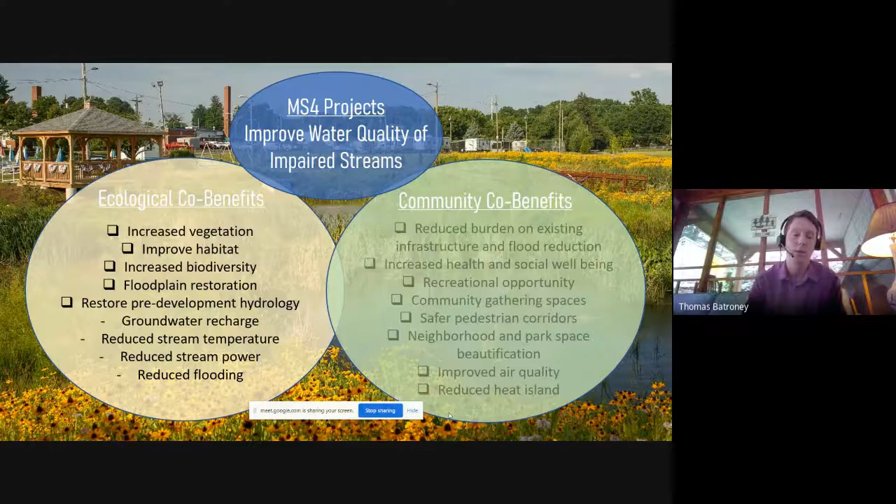And again, that flooding focus is something a lot of communities are seeing everywhere.

And then you go into the community side. You have this ecological angle, then you have the community angle and the human aspect of these projects. How can we take these MS4 projects and maybe reduce a burden on existing infrastructure, and again the flood reduction issue? How do we maybe consider the health of our communities and the social well-being?

This is tied to recreational opportunities, reducing stress, and how do we create these community gathering places potentially? And safety - when we're doing these projects, is there a safety aspect we can consider and improve, or at least make a dent in that safety issue that might be there? And neighborhood, community, and park space and beautification.

We have parks that are a lot of times in need of repair. Is there a way we could piggyback on that need for repair and include an MS4 project or pollutant reduction as part of that? So it's a lot of cross collaboration too between departments - whether it's the parks department and your water department, or your roads department and your water, having that collaboration is key as well.

And there's also air quality and reduced heat island, which are more ancillary effects, but shown to be not only a problem, but especially with climate change, the heat island. The more impervious surface we're seeing, the less we can reduce that - so reducing our impervious surfaces and creating more green spaces and shade for our communities. It's likely the elderly especially that are susceptible to that.

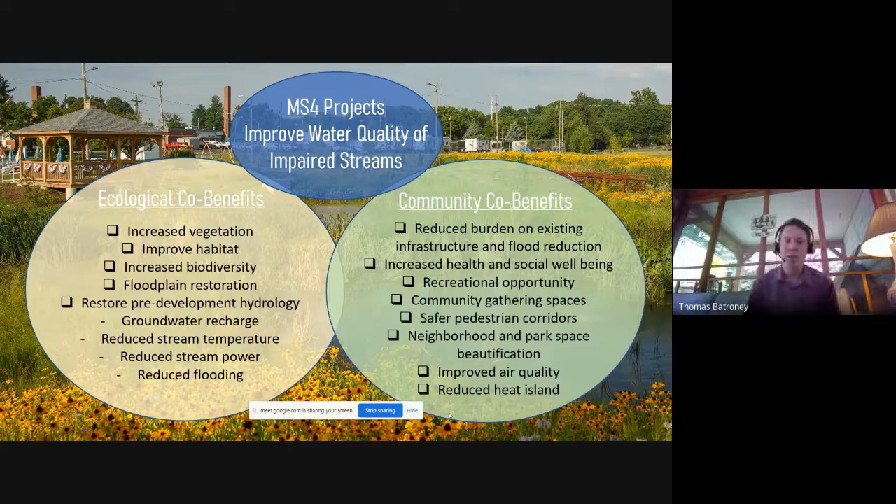And the key is really finding which of those benefits fit best within the context of the project and the community. So in that previous slide, which of those check boxes can we most check off, right? And which of those can maximize our return? What this comes down to, and this might sound simple, it requires planning for these projects through a multi-objective lens. Rather than just looking at water quality, let's look at this through a different perspective - of all those things in that previous slide, are there ways we can check off the most boxes?

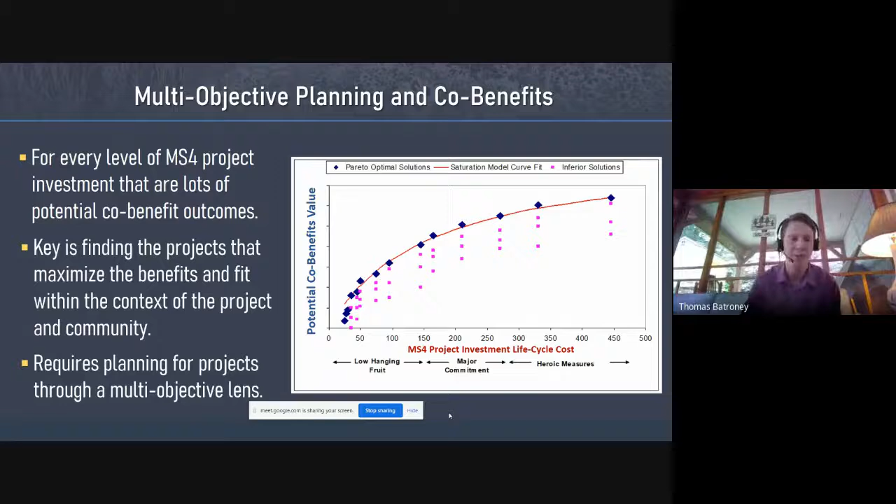But anyway, moving on to today's challenges - the Water Environment Federation released a national survey two years ago on this issue, and without question, stormwater is a multifaceted challenge. It's not just meeting federal and state water quality regulations, which we're forced to do. But if you were to ask these communities all their challenges, there's many. There's a lot that goes into this, and that's why we're here today.

If you look at two of the top ones I highlighted here, funding is always the number one concern, right? We let off that today with our current COVID situation, but in my mind, funding and lack of public support go hand in hand.

Without public support, you're not going to get it. These are two issues that, to my mind, are interlinked. How we can bridge that gap, how we can bring that together, is by including more of these co-benefits. The more we can do these co-benefits, the more we can get that public support up, and the more we can likely get the project funded. The more people can buy in, the more likely I think we'll be able to tackle this problem in the future.

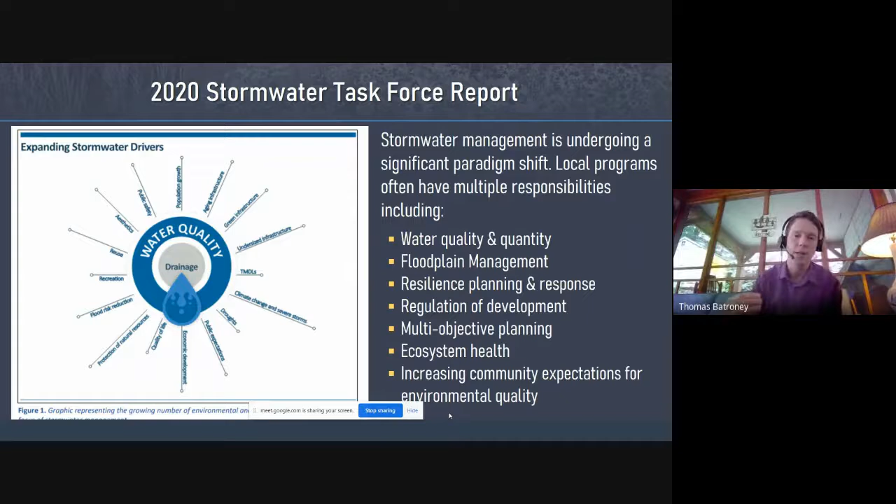I think everyone here, being stormwater planners and stormwater thought leaders on this call, gets these. But I think we need to, when we're out in our communities talking about this issue, be stressing these more and saying them more often.

So again, in summary, why multi-objective framework? We're living in this new era of financial uncertainty and budgets. The more we can do this, the better we're going to be in getting investment in this important issue. It demonstrates to the public that maybe a lot of the public with the single lens pollutant loading, especially in Chesapeake Bay, might say, oh, we're doing it, but that other community over there isn't. It gets into, well, the more you consider these multi-benefits like reduced flooding, increased public safety, infrastructure upgrades, and include that message as part of the overall public outreach, I think it's critical.

I really do. And alternative funding mechanisms such as grants and loans, I said this earlier, I think you're going to see easier access to these the more you can do this. We're seeing this with the FEMA BRIC program that's coming out this year.

Also, the state revolving funds—all of these things are showing that the more you can include these in your grant applications, the better position you're going to be in to receive that grant, and even better positioned to beat someone else to that grant. So, just stressing again, the full life cycle cost evaluation is a critical component to this.

But just to bring this all together with AKRF's approach: what we'd like to do with these projects is find ones that are cost effective first and foremost, and that first starts off with a desktop analysis and also in-field assessments. Sometimes that'll include measurements like we're doing here, where we're actually measuring bank erodibility using jet tests. Once we have that initial data gathering done, we work with the community to align what we found with other capital investments.

And find out where we can maximize our co-benefits potentially with what we found. That includes parks improvements, whether it's streetscapes and paving programs, stream bank restoration—again, which is going to be the focus of our project—and floodplain and wetland restoration. So we have experience in all of these and in getting those done.

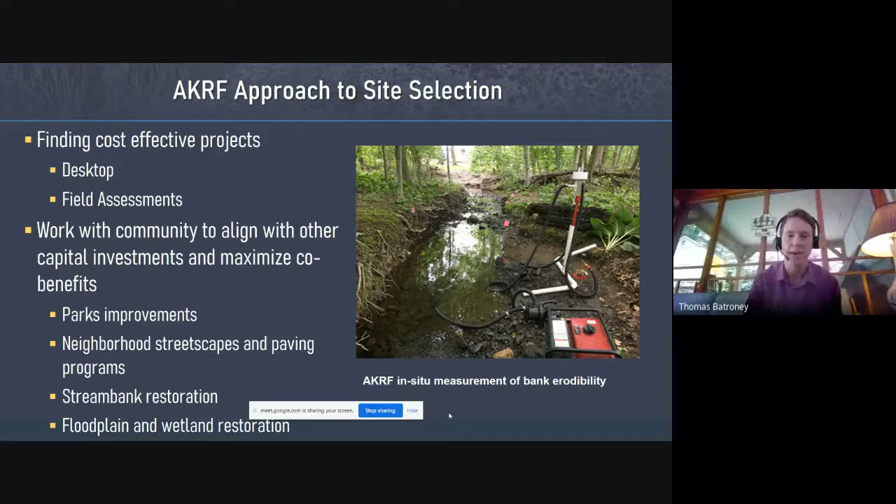Okay, yeah, I'm going to try to go quickly. A lot of folks are probably familiar with these requirements, but for those of you who aren't, it's worth a review. We'll go a little bit in the weeds on these DEP requirements for stream restoration. We're focusing on stream restoration primarily because it's really the dominant approach from a crediting standpoint, and then we can layer in a lot of additional benefits into these programs.

But here's what you need to know about crediting: most of the requirements—PADEP has a defined set of criteria for generating credit for stream restoration projects. And most of the requirements relate back to what's called the expert panel report, which many of you are familiar with—a report developed by the Chesapeake Stormwater Network back in 2014.

The reference is here below. You can look it up online, download it, read it, treasure it. It's really the best resource there is out there for crediting.

In addition to the report in 2020, early 2020, right before the pandemic, they were able to squeak out recommendations that clarify how to apply the expert panel reports to restoration projects. So that's kind of the report that's essentially the law of the land in terms of how Pennsylvania is going to recognize credit using stream restoration projects.

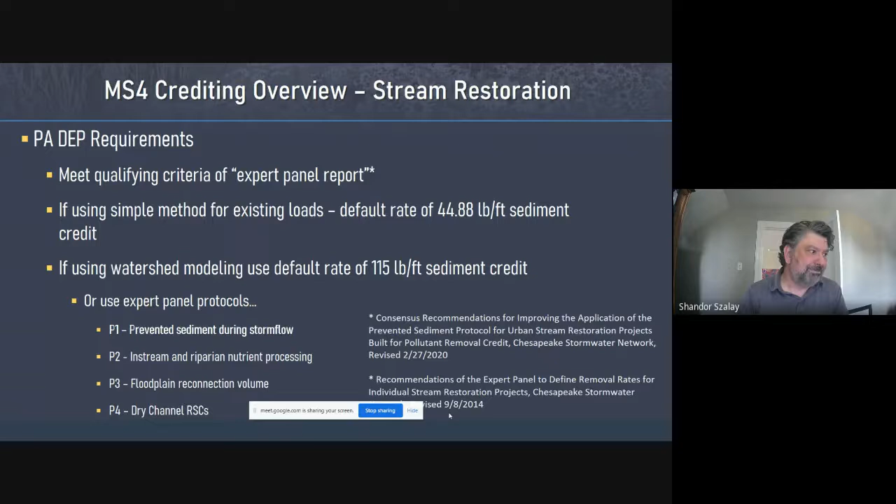So in addition to the expert panel protocols, there's a lot more to the expert panel reports, and obviously everybody should review those in great detail.

But DEP did come out with a memo back in May of 2018 that provided some additional considerations that would layer on to the expert panel protocols in terms of how to permit or how to earn credit for stream restoration projects. And really, if you boil these down, there's a number of specific requirements you can see on the slide.

But it's really that they want these projects to be integrative projects. It's really, I think, speaks to what Tom was talking about - holistic approaches that emphasize floodplain reconnection and reconstruction in particular.

Not really crediting armoring projects if you're thinking that you're going to go in and use riprap or gabions or something like that to generate credit. That's kind of a no-no, and that's echoed in the 2020 expert panel recommendation supplement as well.

A 35-foot minimum buffer, so that we need to have a nice riparian zone on both sides of the stream. No dinking and dunking with small projects, so you need at least 100 foot of project length. Trying to treat the upstream impervious - I'll mention that in one of our case studies - and then making sure that you're going on both sides of the channel where feasible. It's not always feasible, there may be land ownership issues, but in particular, when that's possible.

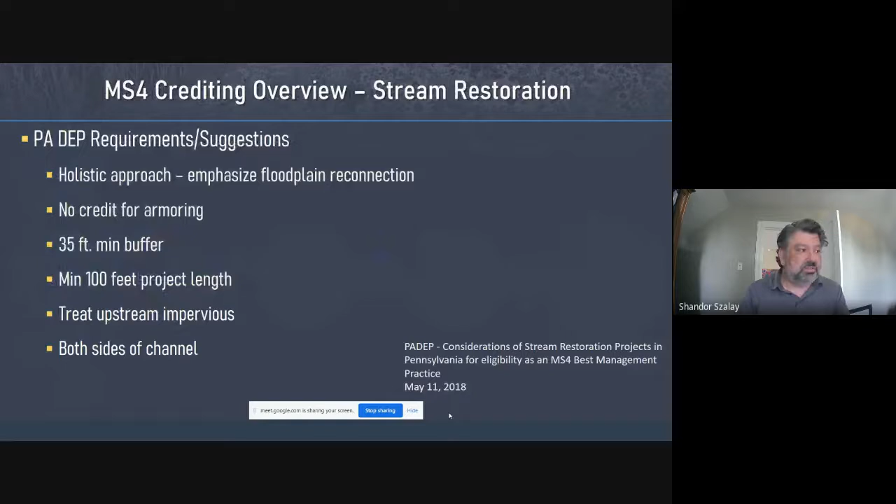Anybody? No? Okay, so just to drill down a little bit into Protocol 1, I won't get too in the weeds on the expert panel reports, but wanted to drill down a little bit on Protocol 1 since it's such a critical protocol for prevented sediment for stream restoration projects.

When you look at Protocol 1 in detail, there are really three primary components you're going to use. You're going to estimate a bank erosion rate based on what's called a BEHI rating, which is a bank erodibility assessment, married with a near bank shear stress assessment, which is like the shear stress applied near the erosion site.

That's going to be your bank erosion rate, the height of your bank, the bulk density, which is how dense the material is, converting essentially from volume to weight. And that's going to give you this gross bank erosion in pounds per year.

And then you're going to apply two ratios to this gross bank erosion. One is called the sediment delivery ratio, and that accounts for the fact that not all of the sediment you're preventing from eroding turns into a sediment reduction in the Chesapeake Bay itself. There's a ratio of sediment produced at a site to what's delivered to the bay, since there's a lot of storage in floodplains and in-channel storage along the way.

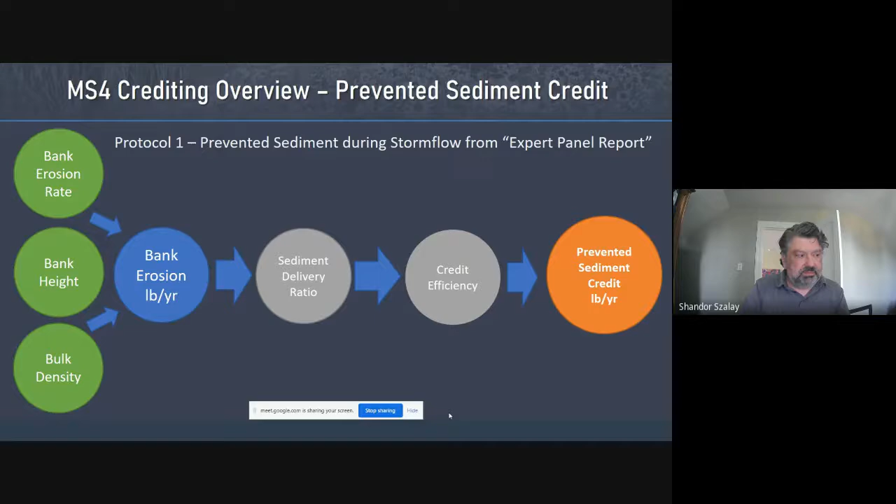So the first project I wanted to talk about is a stream restoration project that we worked on several years ago in Chester County, Pennsylvania, which is southeastern Pennsylvania, on a country club, actually called Whitford Country Club.

This is a little headwater stream called Colebrook Run, a little first-order tributary, but really causing a lot of havoc for the stream and for the golf course in particular. So they called us up kind of out of the blue with concerns about repeated damage to the course from erosion and flooding.

And this history of Band-Aid solutions, so they would erode in a particular area, they would put some riprap there, continue to erode, and they wanted really a holistic approach. So we sat down and met with them.

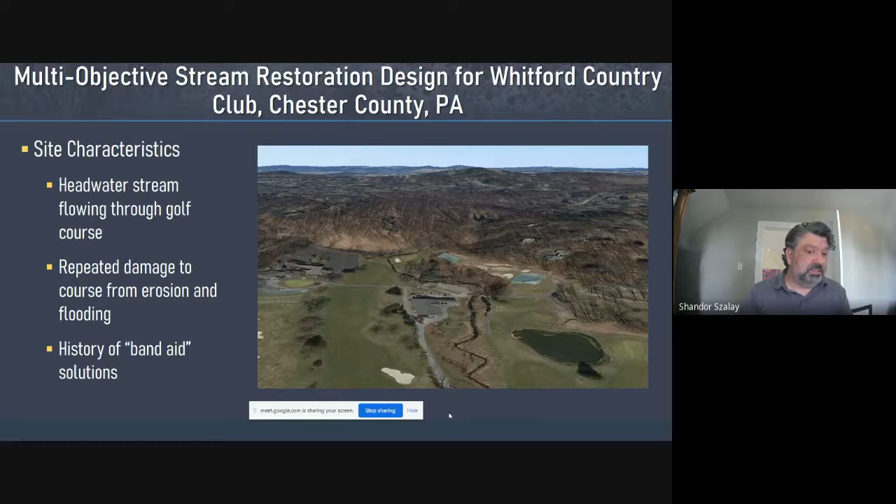Next slide, please. We teamed up with the local conservation district, and talked about some overarching goals. This was really also tied to a Growing Greener grant that we were interested in applying for.

And ultimately we were successful in securing about $400,000 for that grant. But you can see the goals are very multi-objective, nutrient sediment loading definitely, we need to do that for our...

MS4 and Growing Greener grants. Protecting near course assets, we had a clogging irrigation intake as a result of all this sediment that's in play. Improving aquatic habitat, course aesthetics, maintenance facility runoff.

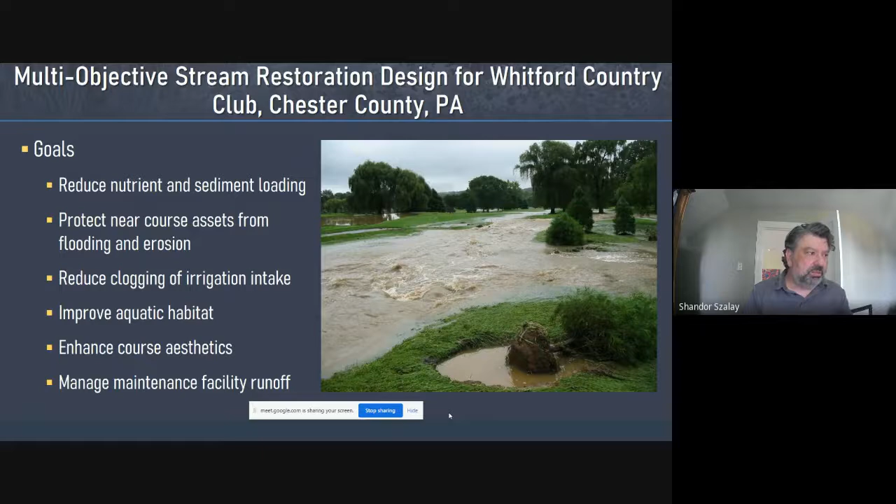So the approach was really, I'll go through a series of slides talking about the approach, and you'll see some built project photos. This was at the upper end of the course, a very high energy, steeply sloping channel with lots of bank erosion, causing coarse material to be put into the stream and transported downstream into less steeply sloping areas, filling in the floodplain and channels and leading to flooding. We wanted to get that under control using a boulder toe and soil lift approach.

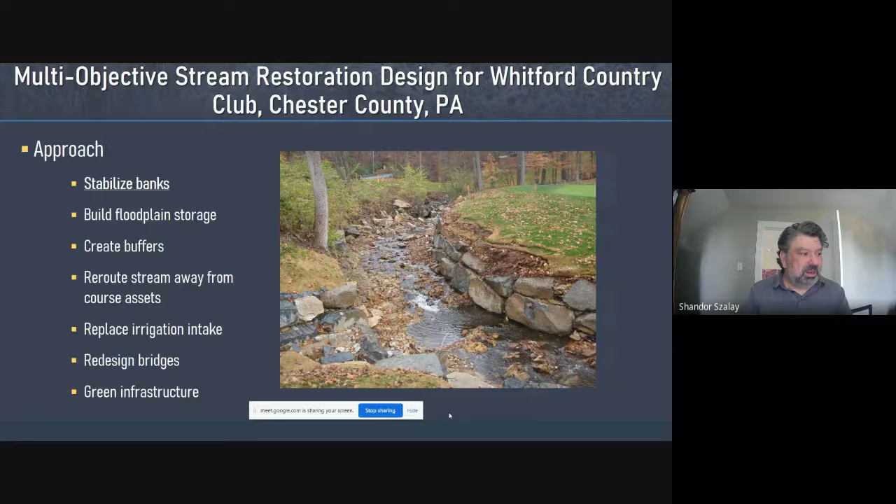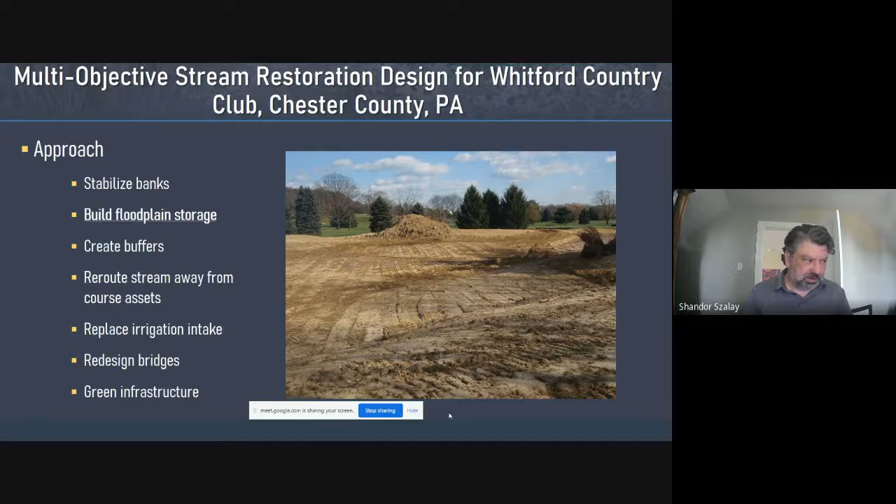In the middle portions of the course, we excavated a large floodplain. This was a huge excavation project to lower the stream by about 4 feet, which is where all the flooding was occurring. We built a new floodplain at a lower elevation and completely rebuilt the channel of the meandering stream using natural channel design principles. We were able to use the excavated material to build a new driving range for the course, a great reuse of material on site.

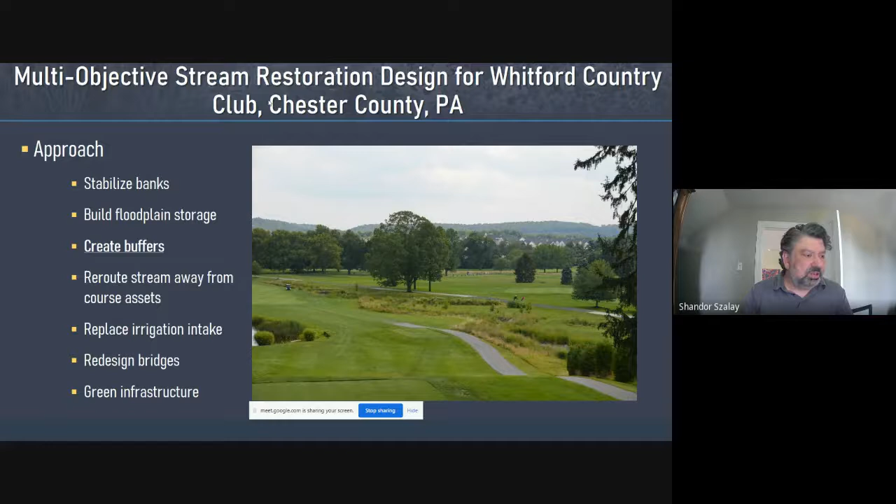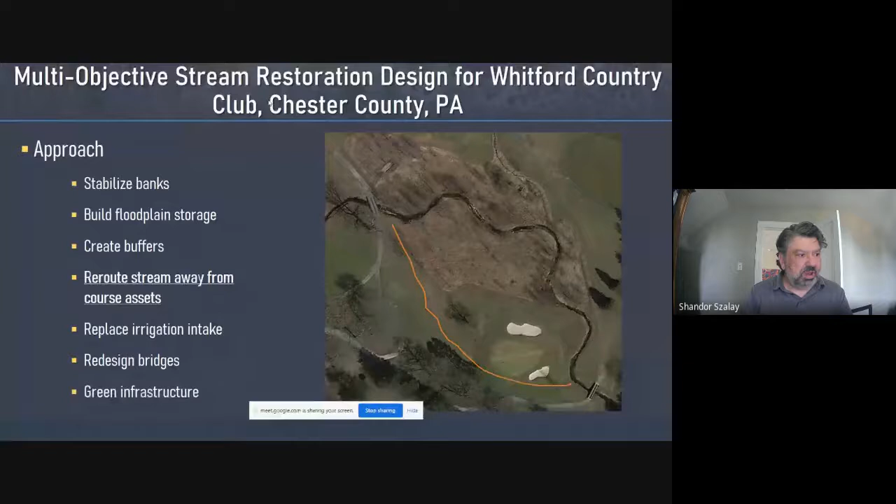In the lower areas of the course, we were able to completely reroute the stream. You can see the pre-existing route in orange here. We created a meandering channel that went out into this old field, away from the course, which is great for the course. For the stream, we were able to route it through this corridor, which is now completely forested - we planted hundreds of trees here. The regulators really loved this, as well as the Growing Greener funders. It was a big win for the ecology of the stream.

We were able to install a lot of woody debris and root wads into this section, things we couldn't do in the more developed portions of the course. Turning our attention to ecology and allowing the stream to do its thing in this old field was a critical approach. Then layering onto that...

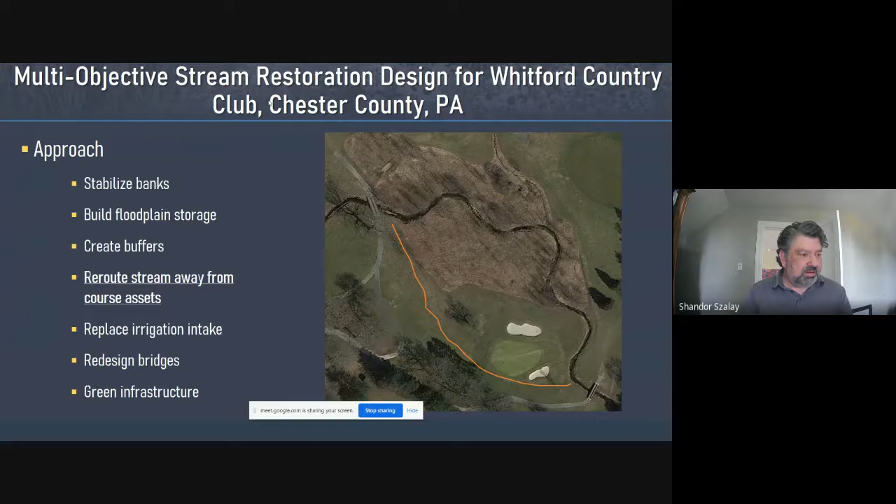Replacing the irrigation intake - that's the new intake there. It was previously clogging, so we located it in a step pool structure so it would draw nice, clear, clean water within an existing design pool, which is a great improvement. You can see their irrigation pond a little further down.

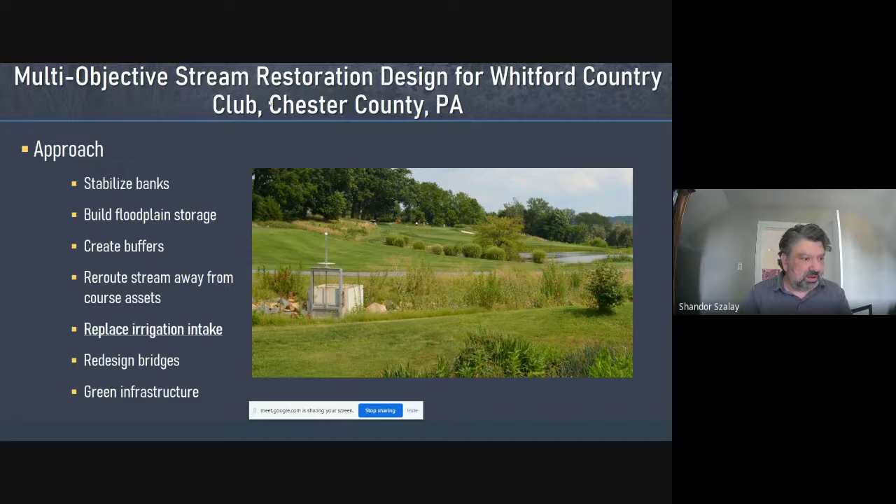And then redesigning bridges. There were some fish passage issues associated with the current vehicular bridge, so we replaced the previous bridge with a Contech modular arch bridge with a bottomless design to promote fish passage, and also replaced about 7 or 8 cart bridges along the way to reduce accelerated flow through the bridge openings, which was creating a lot of bank erosion.

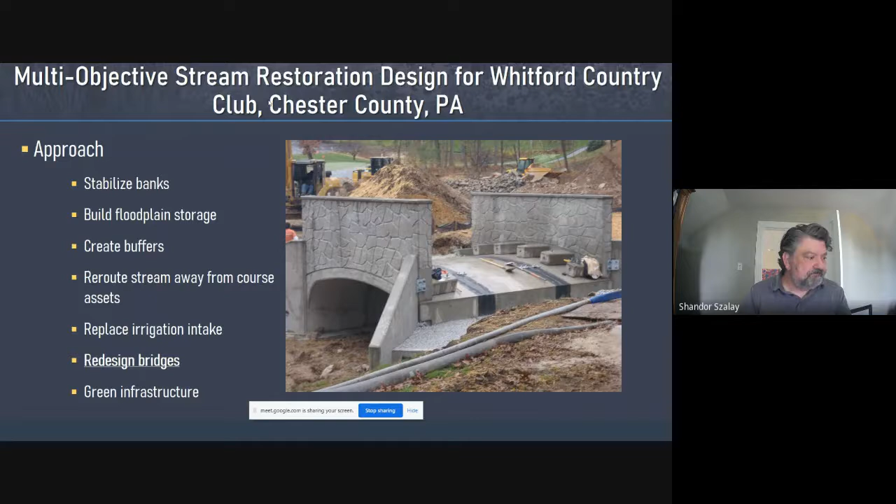Finally, green infrastructure was a big part of the project - you can see some bioswales adjacent to the creek providing treatment of runoff from their maintenance facility, which is located right near the creek. This was a big draw for funders and provided lots of pollutant load reduction. The idea is doing a lot of things with the same project. In this particular project, the best part was that the municipality, West Whiteland Township, didn't have to spend any money on it.

The club actually funded the entire project, minus the Growing Greener grant, which is about $400,000 of the project. Total project cost is about $1.2 million. The club, through assessments of their membership, paid for about $800,000 of the project. So zero net or gross investment by the municipality to get all these benefits.

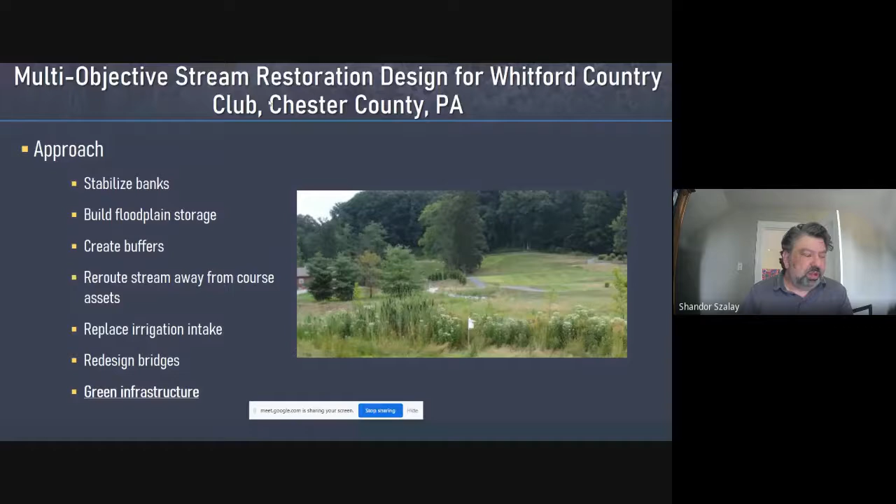So I want to move quickly into another case study, and I want to turn it over to my colleague Kevin Flynn. This one was in the Wises Mill Run watershed in Philadelphia. This is a project we did. We've done several projects like this in the Wissahickon.

It's a steep headwater tributary feeding the Wissahickon, which has a high flow TMDL for sediment, with a large impervious drainage area, although the park itself flows through a nicely wooded riparian valley. The drainage area is highly impervious, about 200 acres draining to this point, resulting in very significant bank erosion and sediment production that we have to contend with.

As with the previous project, we sat down with the Philadelphia Water Department and talked about multi-objectives: putting a premium on reducing sediment and nutrient loads, but also improving aquatic habitat, protecting and repairing near-stream infrastructure, and preserving the historic character of the valley, which has significant old walls and other historical remnants that are pretty interesting.

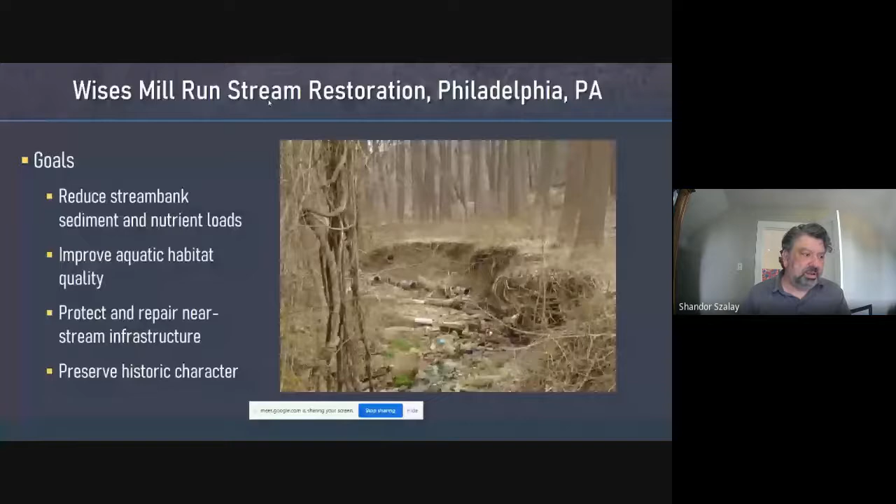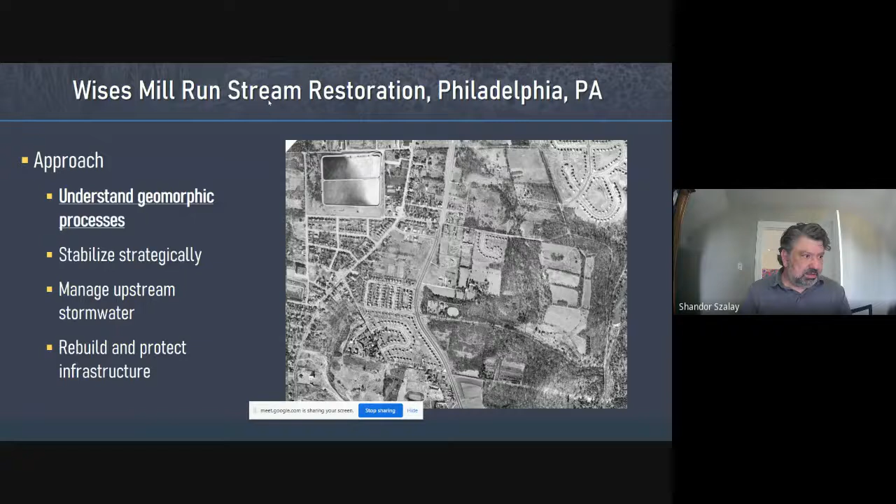We conceptualize that response using a channel evolution model in which the common response is degradation, widening, reaggradation, and a quasi-equilibrium. That whole sequence moves from downstream to upstream, so you have downstream segments that have already gone through that sequence, and upstream segments that are pretty raw and still going through a lot of adjustment.

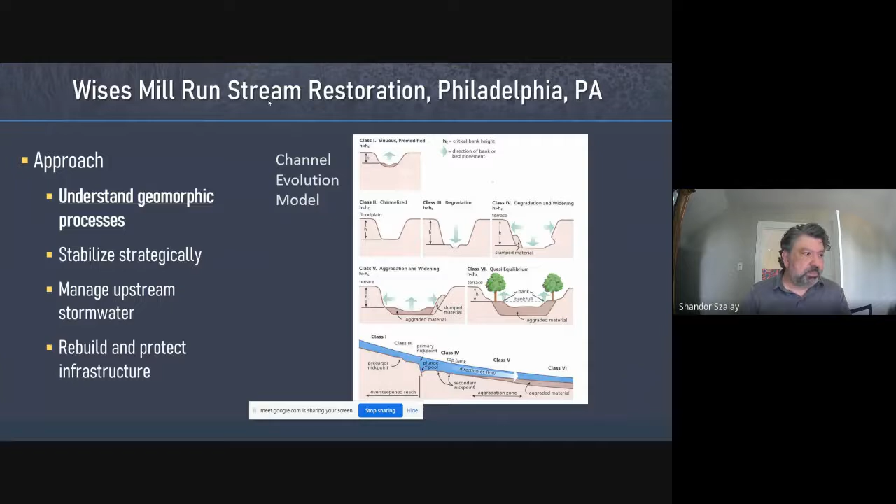At the upstream end, the down-cutting runs into an existing stormwater outfall, which is really the head of the channel. So we have infrastructure damage and a lot of active erosion in these upstream segments as well.

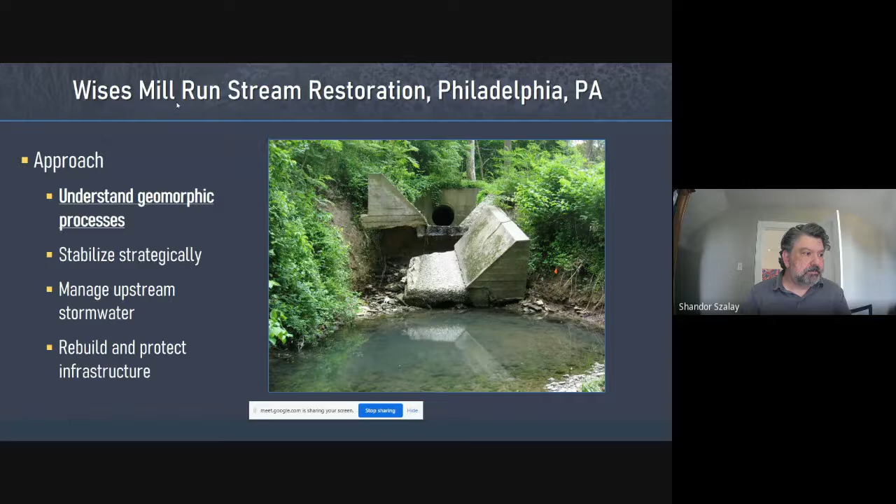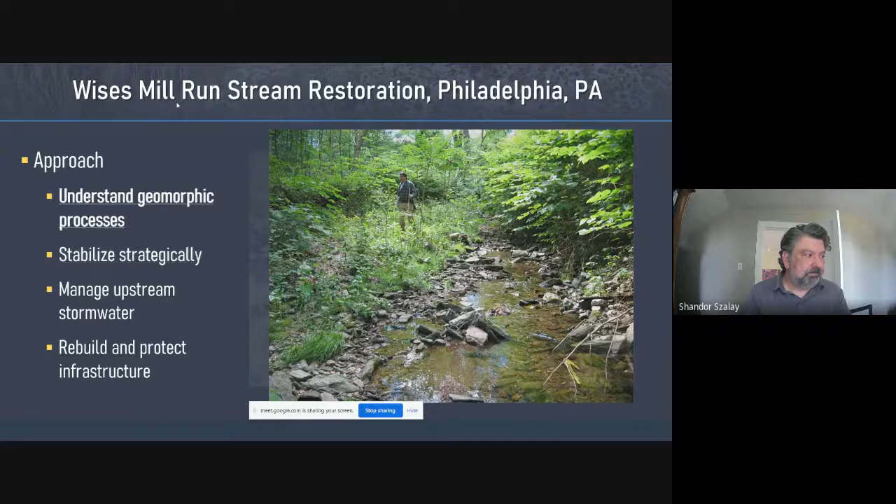We wanted to stabilize the stream channel strategically, so most of our active stabilization and restoration work was concentrated upstream. You can see a step pool channel here and some outfall stabilization work at the outfall I just showed, really focusing that active stabilization on the upper portions of the channel, which were still pretty raw and adjusting in that channel evolution model sequence.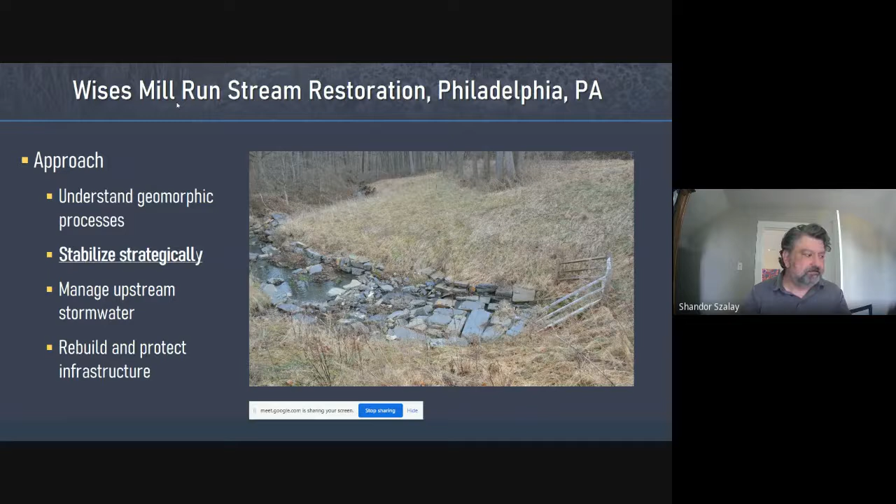With this approach, we really wanted a multi-objective design even with our stormwater wetland—looking at detention time for water quality benefits, infiltration volume for base flow, and excess shear reduction for channel protection. That's a measure of the exceedance of the critical shear stress, which is actually responsible for erosion in the stream channel. I'll get to how we go about looking at that on the next slide.

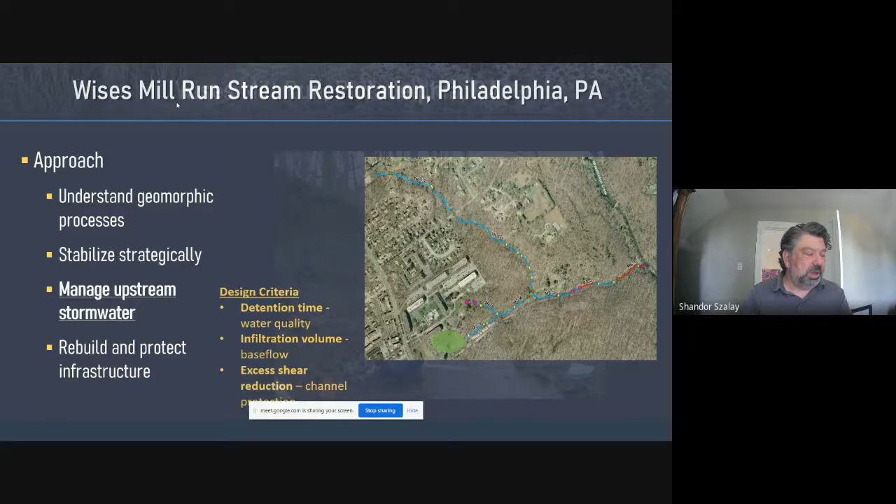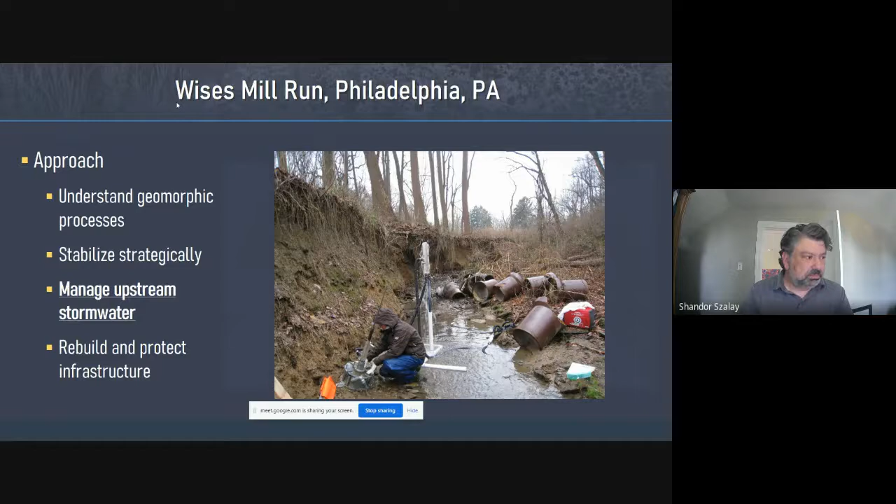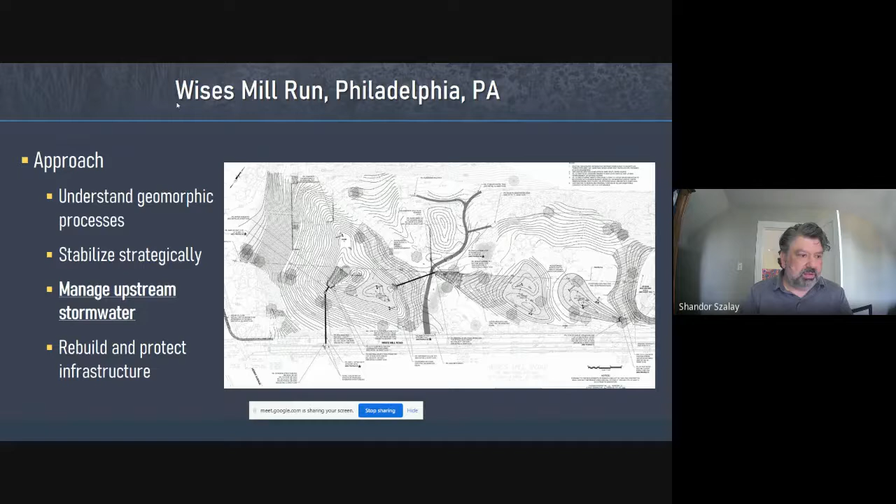And this is a grading plan showing the full wetland. We have water being diverted from a large stormwater main along Wise's Mill into an upper wetland basin or cell, and being transmitted via pipe flow and swale to a lower, larger wetland cell before being diverted back into Wise's Mill Run.

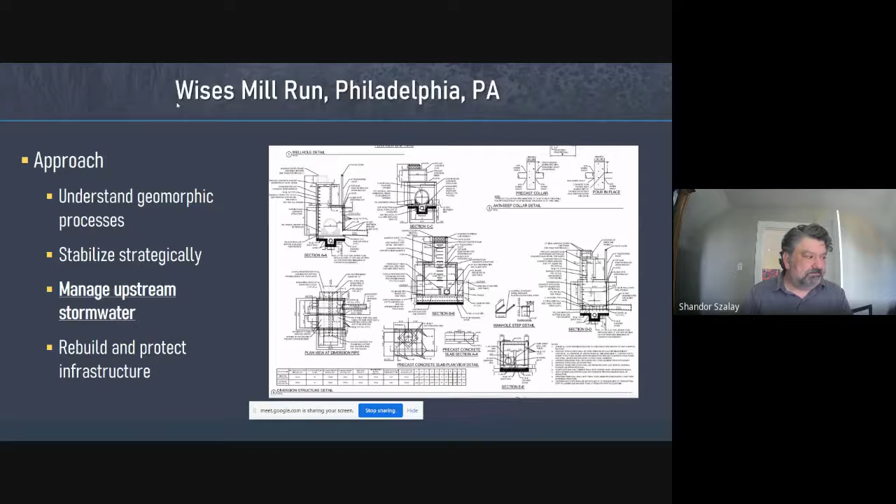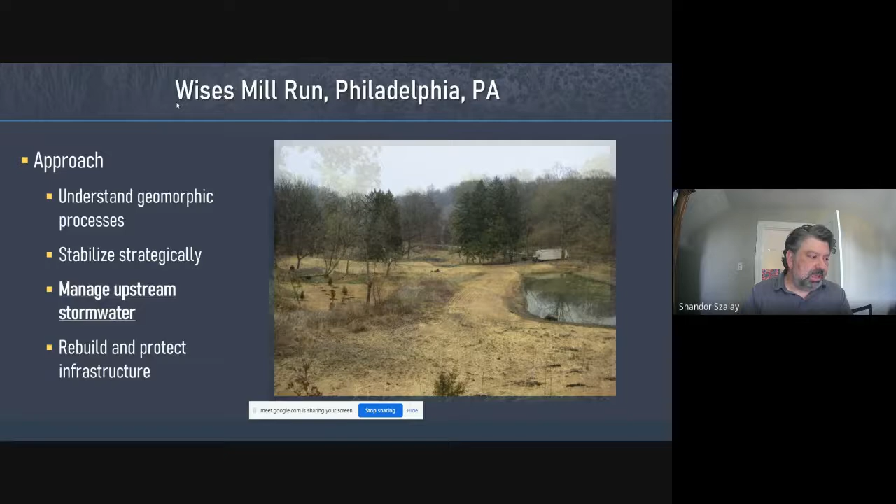And the project a few years after installation. It's actually not that far from my house—I get to hike with my kids over here, and this is a great natural area. You'd never think this is doing anything particularly impressive as far as an infrastructure function, but it is—there's a lot of engineering behind it. But to the general public, and even to me when I'm just out there, it just seems like a nice place to be. I think that's a really important part of our design strategy: creating places that people like to go and recreate.

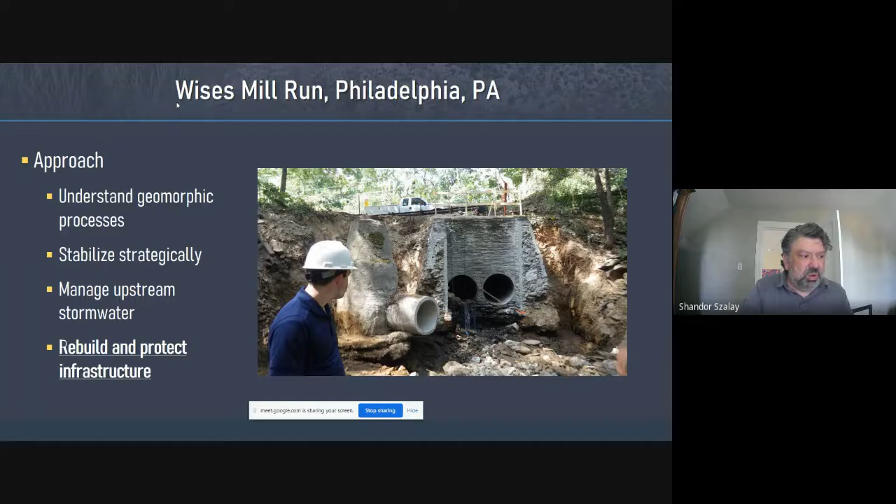So the final piece of this project I want to talk about is the infrastructure protection and repair aspect. There were a lot of these spot repairs to infrastructure that we layered onto this project. This is a culvert, a twin bore culvert coming under Summit Avenue, one of the tributaries. This is mid-construction, rebuilding severely eroded wing walls and tying those into existing stormwater outfalls.

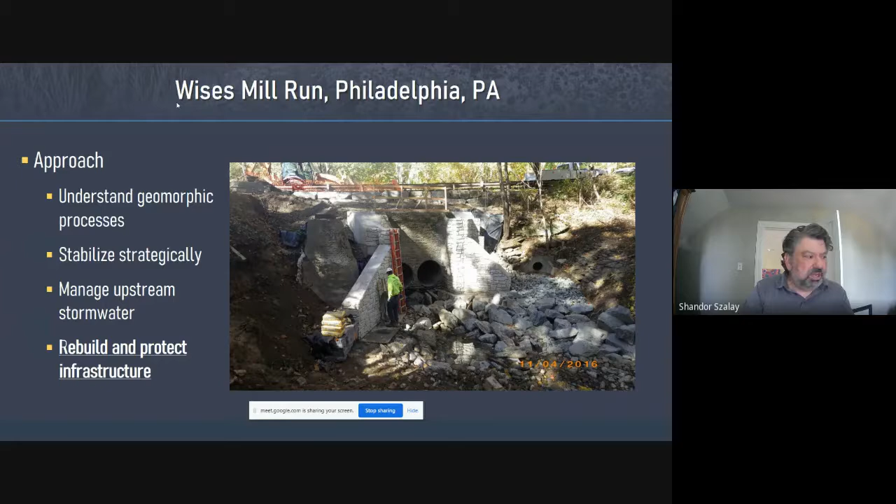And you can see a little bit further along in construction, lots of hard engineering, structural engineering here, figuring out how to do these custom wing walls. These are all cast-in-place structures, but integral to the project in terms of delivering an overall value to the city and stressing the multi-objective approach. So with that, I think I might be done.

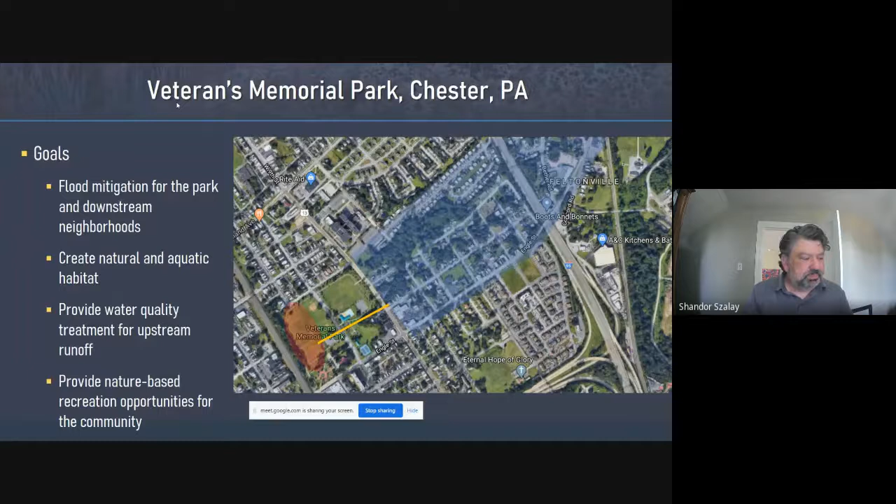Thanks, Shandor. I'll just move quickly through another example or two here. One of the keys to being able to do these multi-objective projects is finding great sites to do the projects that allow you to achieve all those objectives. This site we're going to talk about is Veterans Memorial Park, located in Chester, Pennsylvania.

So the park here is in the image, on the lower left side. There's a lot of active recreational space in this park that's very well used. But then there's this 5-acre space on the southern end of the park, highlighted in red on the slide, that's completely underused, primarily because of flooding.

The major cause for this flooding is a buried stream under the park. That stream, now contained in a 6-foot diameter storm sewer, has a drainage area of over 200 impervious acres that drains through this park. In the park, that 6-foot diameter pipe necks down to a 36-inch pipe before it crosses the Amtrak right-of-way, shown in the bottom left corner of the image. The downstream infrastructure is significantly undersized as well, so major conveyance issues are a major cause of the flooding in the park and surrounding area.

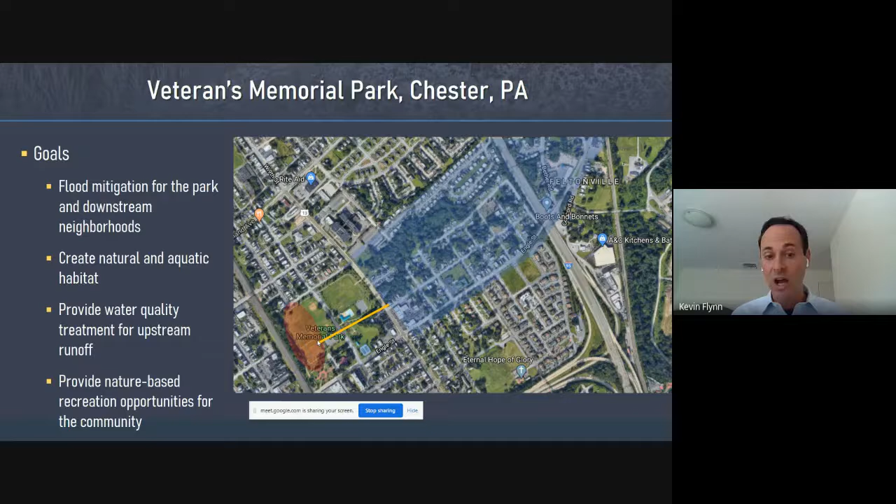Second, maximize water quality treatment through detention time and filtration through the system, removing as much pollutant from the MS4 as possible. Third, create natural habitats — there's a very high groundwater table in the park, which can be seen as a constraint, but here we're treating it as an opportunity for a sustainable, perennial wetland even through dry conditions. And last, provide fishing opportunities.

The proposed basin will create over 2 acres of open water in the park, and we're able to integrate access through a fishing bridge as well as a trail around the entire pond. We're also able to incorporate a gazebo and community gathering space, and fit all this into a space that doesn't impact the existing active uses in the park, particularly the ball fields to the north of the system.

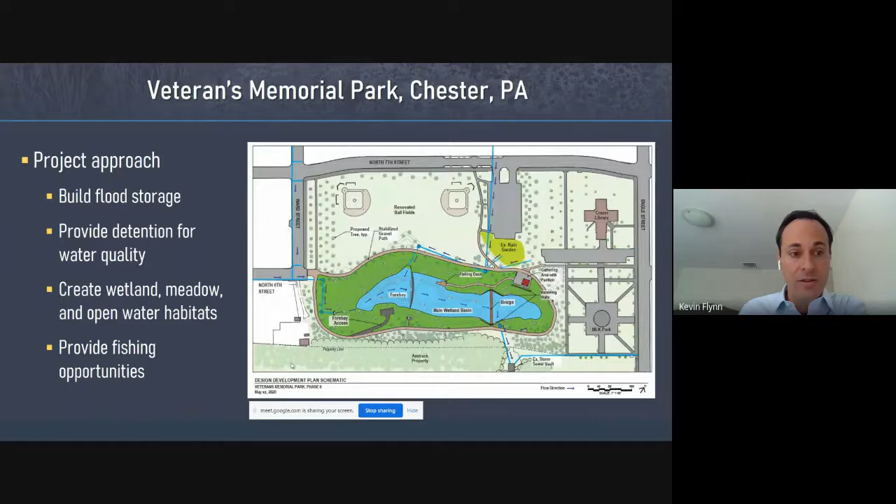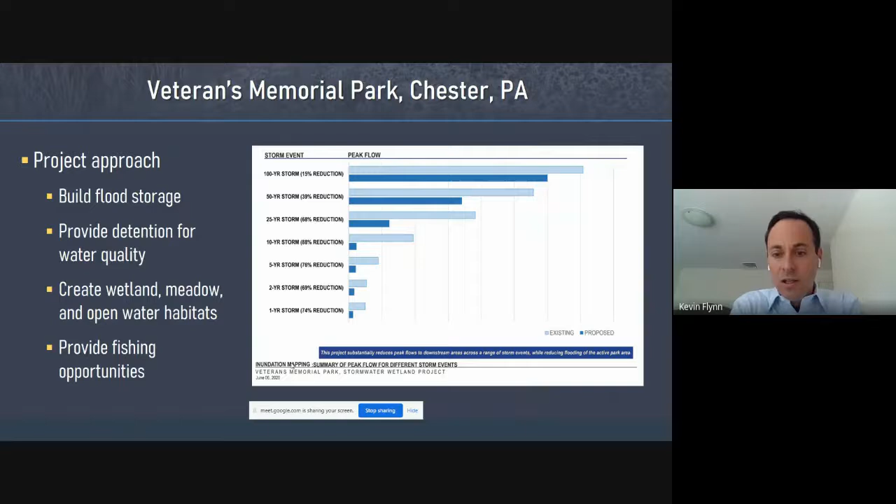This is a quick look at the 2-year storm event. In that event, we're looking to eliminate flooding within the park completely, containing those higher flows within the wetland complex.

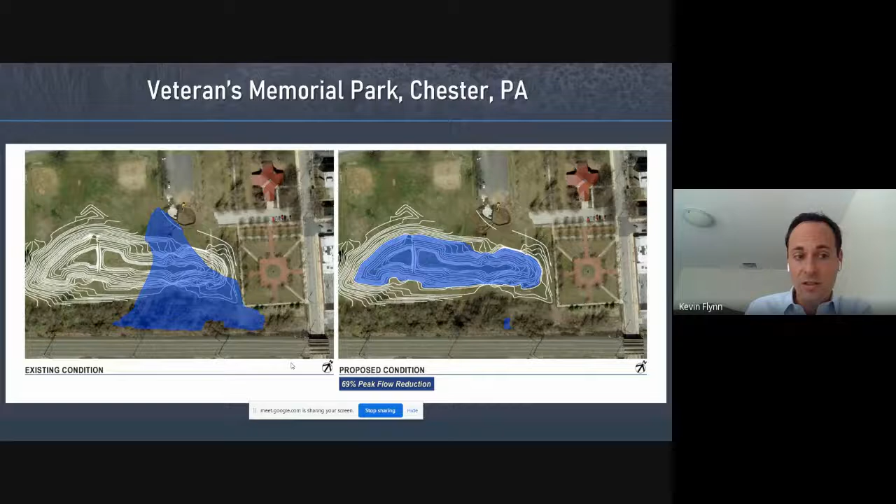Just really quickly, this is another park project very similar in many ways to Veterans Memorial Park, reinforcing the point that finding the right sites is critical to meeting multi-objective criteria for these projects. This is Wissahickon Park in Lansdale Borough, which again was very underused because of flooding issues and significant stream bank erosion through the park, with little to no stream buffers throughout.

And then there are actually 3 MS4 outfalls in the park. This project, which was completed about 10 years ago, created infiltration basins at all those outfalls, stabilized the stream banks, as well as created stream buffers within the park.

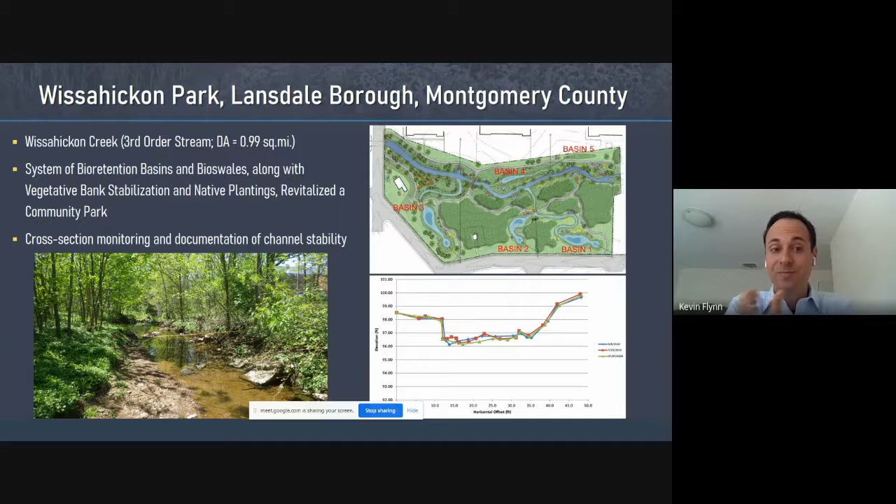This project was not only able to reinvigorate this park, but was able to meet all of the borough's TMDL and pollutant reduction plan requirements for the Wissahickon Creek watershed in one single project. It's being credited at nearly 130 pounds of sediment removal per year for their TMDL and MS4 permit compliance.

As I mentioned, the project was completed about 10 years ago, and the response of the stream corridor in the park itself has just been incredible in this time period. The annual operation cost is very minimal as well for the park.

The basins themselves are maintained by public works staff, and we're assisting the borough with performing ongoing monitoring of stream stability, as well as the performance of the infiltration basins. As Shandor mentioned before, there's even potential—the borough doesn't need it specifically for their permit—but through that monitoring there's potential to demonstrate additional sediment removal credit.

I just want to mention, we did not design this project, AKRF, but we worked with DEP on the crediting that has just been approved for the current MS4 permit cycle, and we're performing that long-term inspection and monitoring for the project. So just a couple minutes left.

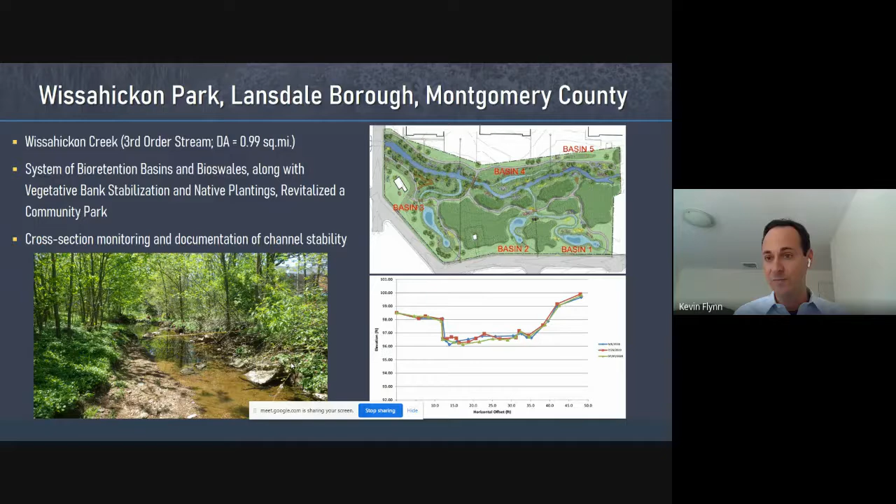Thanks, Kevin. I hope this gave a flavor for what we were talking about with multi-objectives and co-benefits. This is really the root of our firm—environmental projects and making sure that we're working in our communities.

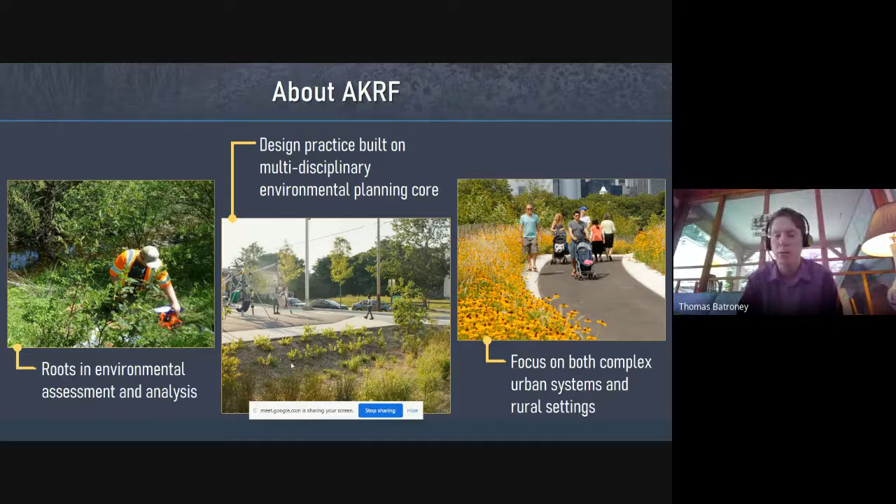We want to make our communities a better place to live, right? Our focus has always been on environmental assessment and analysis, and designing around that, with an environmental planning core. We go anywhere—urban systems and rural settings, like we've shown in our case studies.